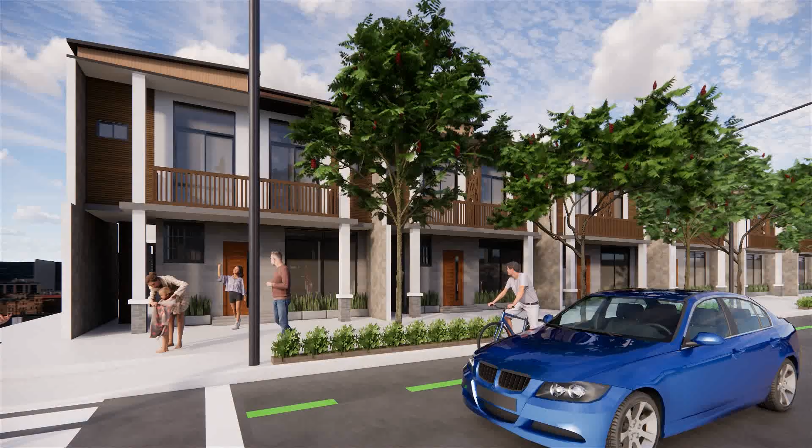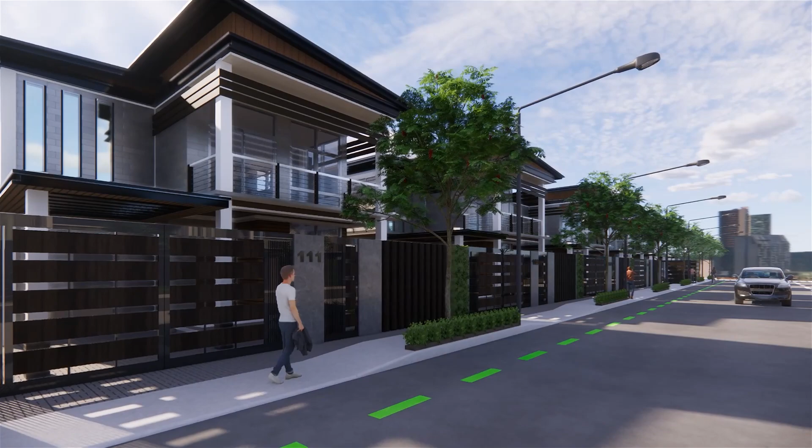Kahanggan, or kapitbahay, a common word known to all of us, is a direct derivative of kapit meaning to hold and bahay meaning home. We want to build a community that does not just provide shelter to individuals but also strengthen social bonds within each household, creating a socially just community where people of different classes can interact with each other. Thus, Alto Pueblo is born.

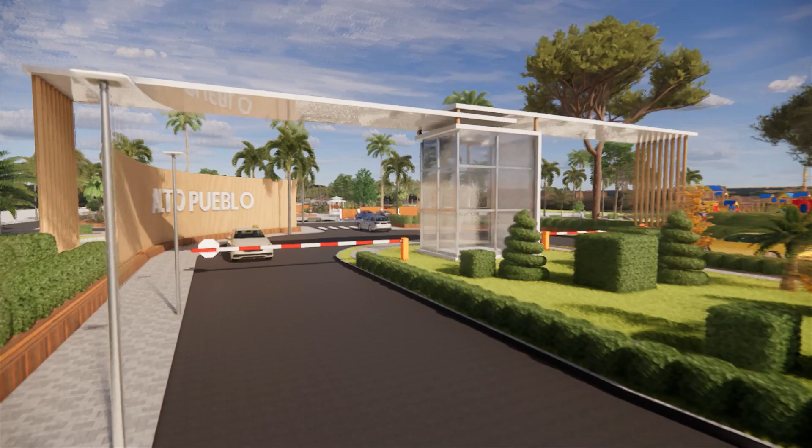Alto is a Spanish word meaning to rise, and Pueblo meaning a community. Together, this place brings an elevated living, literally and metaphorically, creating a community where each resident can rise to the standard of living with the aid of architecture.

Kahanggan: building human-centered comprehensive housing development through responsive neo-traditional urban community in Batangas City. The project Kahanggan aims to eradicate overpopulation by addressing inadequate housing in one of the most populated cities outside Metro Manila, Batangas City.

Barangay Wawa, directly adjacent to Barangay Libjo in Batangas, where the site is located, experiences problems in housing, such as rapid growing population, which in turn generates informal settlements. Such settlements can be seen and are observably evident along the shoreline of Barangay Wawa. Some of the locals are the Bajau community that lives off fishing, thus their strategic location on stilts above water.

The problem of overpopulation, which presents social and environmental problems, must be faced. The lack of job opportunities results in poverty, which in turn produces a higher crime rate. Furthermore, environmental impacts present as follows: pollution due to overpopulation results in lack of clean resources, which in turn destroys the mangrove ecosystem in Batangas. These problems all result in vulnerable living conditions.

The design concept of the housing development follows the practice of neo-traditional urban planning, or new urbanism. The concept of connected patterns of tiny, well-designed streets in neo-traditional neighborhood design is intended to increase community access despite modest design speeds. The multiple streets allow for more travel options to destinations while also dispersing traffic.

This concept will aid to give the local community an improved quality of life that abides with sustainability practices while boosting the economy and empowering the local culture.

For the form concept, we decided to go with the biophilic design concept, in which we will employ mangrove trees and stilt houses for the form of the building and as the unifying element for this project, which will be generated from a biophilic standpoint. The structures will mirror the shape and form of the tree in which it will be a suitable planting site.

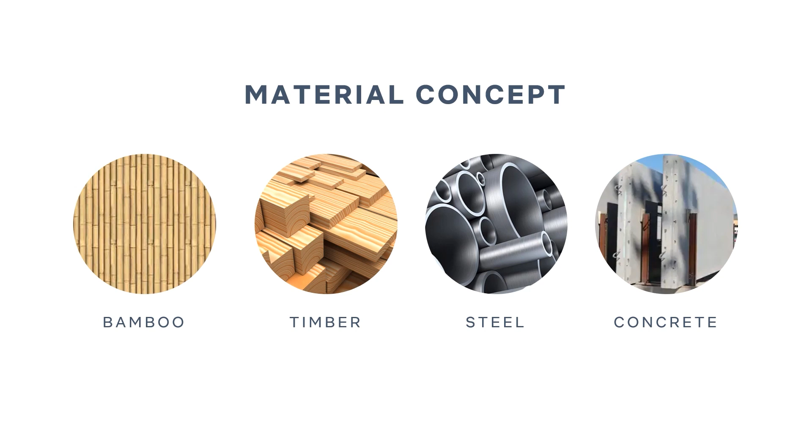Following that, our concept will consist of the traditional Bajau houses, characterized by traditional Filipino huts on stilts above bodies of water for the elevated form of the houses that is adopted in the design. In terms of materials, our proposed project will include bamboo and timber as well as steel and concrete.

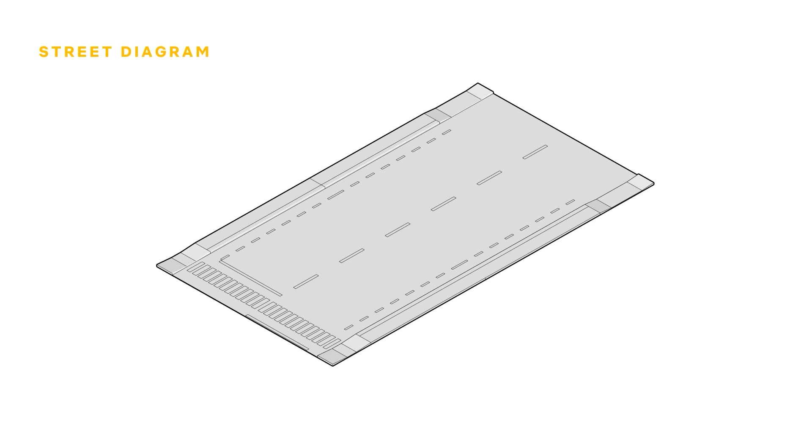Located in Libjo, Batangas City, the site covers an area of 215.13 hectares. Road networks follow the natural flow and contour of the land as well as follow a radial plan to ease and minimize traffic. The roads utilized in this subdivision are divided into the following: the road right-of-way, the bicycle lane, the pedestrian access, and the planting strip.

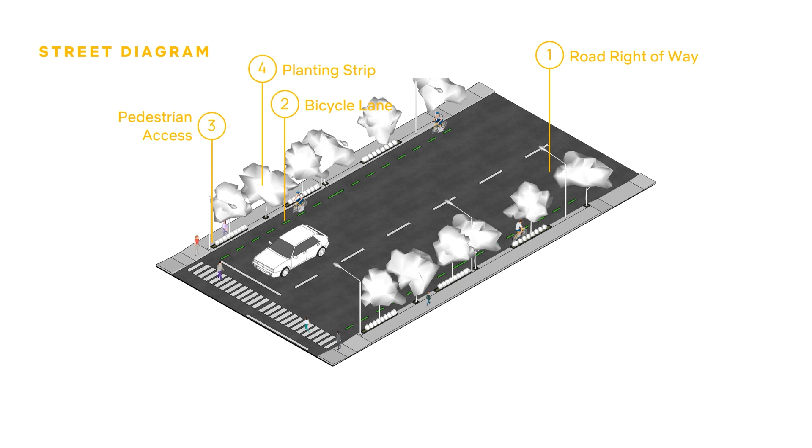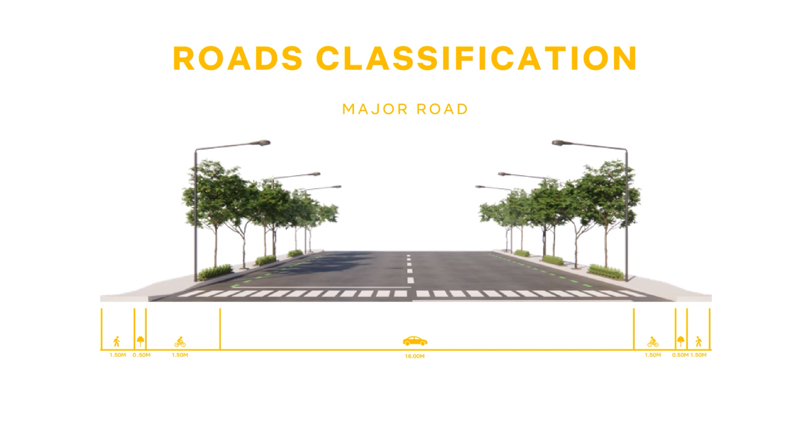The concept for these roads is to encourage walkability, for it to be more pedestrian-centric rather than being car-centric. These road divisions are applied in the three classifications of roads used in the subdivision, and they are the following: the major road, the collector's road, and the minor road.

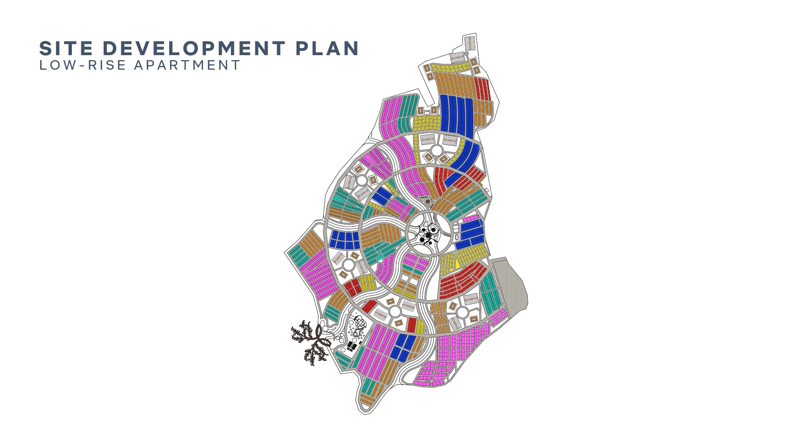Furthermore, housing types are integrated with each other, creating a mixed and diverse community to maximize social interaction. Housing types are as follows: socialized villas, economic villas, open market villas, socialized townhouses, economic townhouses, open market townhouses, mid-rise condominium, and low-rise apartment. Meanwhile, other facilities such as commercial spaces, daycare, and ecumenical chapel are also present on the site.

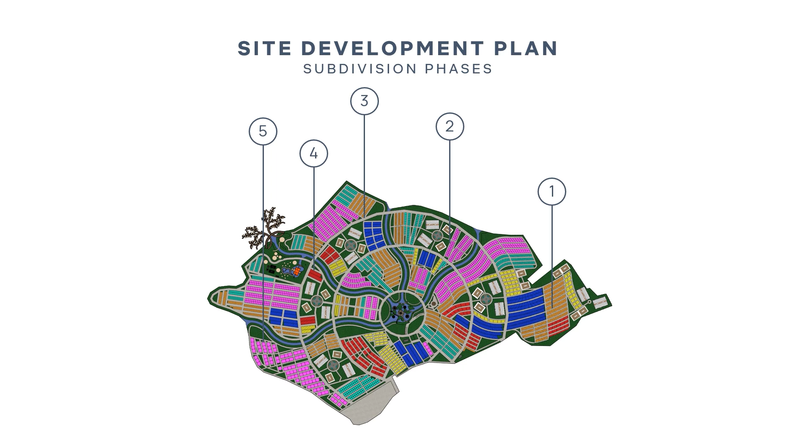Green spaces are scattered throughout the site to allow a breathable and communal space for each area of the site. Dividing the site are water channels that act as floodways to minimize flooding within the area. These divisions are phases 1, 2, 3, 4, and 5. Each phase has a mixed and diverse housing type as well as providing necessary services to each resident of each phase.

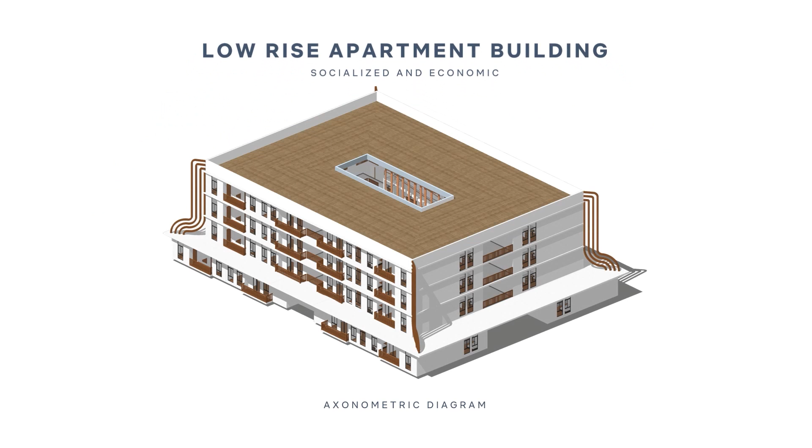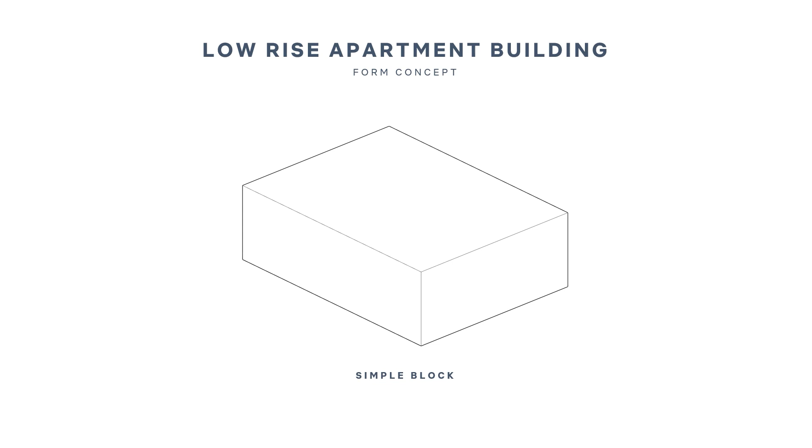Moving to the facilities and houses inside the Alto Pueblo, we'll start off with the low-rise apartment. The low-rise apartment is a 4-story building that is placed in the center of each phase. The building follows the form of a mangrove and is presented here in the form concept, starting off as a simple block. Next is the layering or division of floors. Next is conforming with the mangrove root shape.

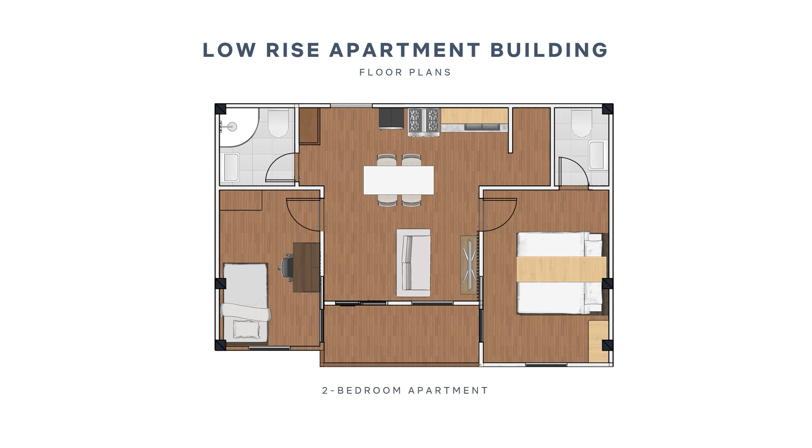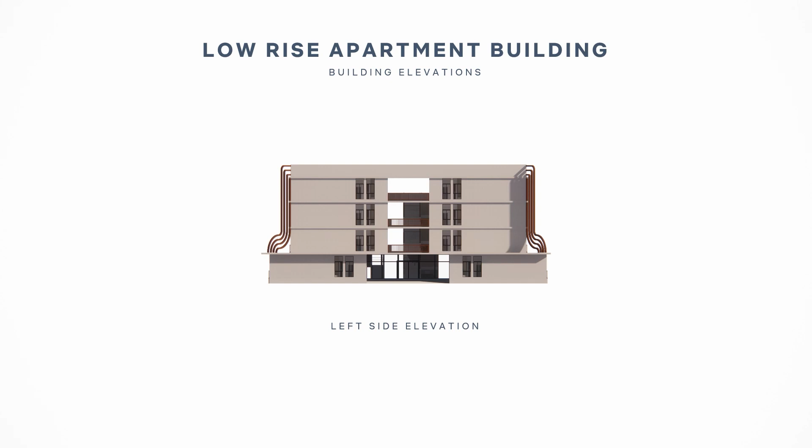The low-rise apartment provides a selection of low to middle-cost apartment units ranging from studios to one-bedroom to two bedrooms. The ground floor houses the main entrance and reception room, as well as the office and utilities, and 8 residential units. The second to upper floors have 16 apartments with 16 apartment layouts. Here's the elevation for the low-rise apartment. The materials used in this structure include prefabricated concrete, stucco finish, timber wood, steel, and bamboo materials.

The mid-rise condominium is an elevated, on-stilts, 9-floor, 2-floor unit building that sits on the center of each phase. The form follows the stilt concept as well as reflecting the image of a mangrove tree.

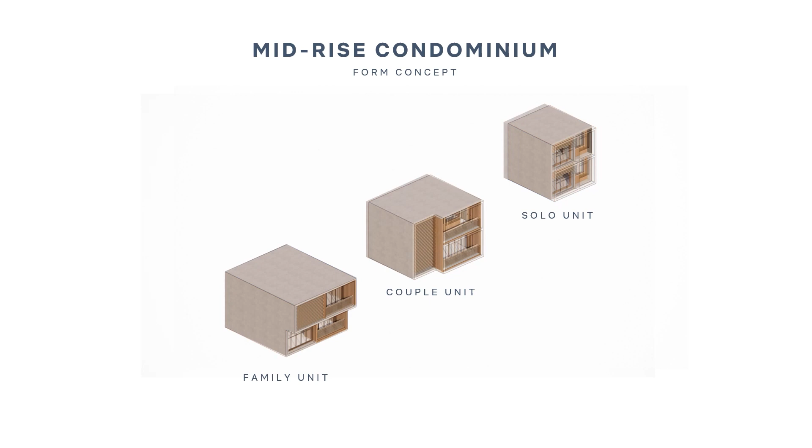The condo is a stack of units, namely solo unit, couple unit, and family unit. These units are supported by a 24 megacolumn that runs along the structure, holding each unit in place and carrying its load. Overall, the condo consists of 4 stacks of units.

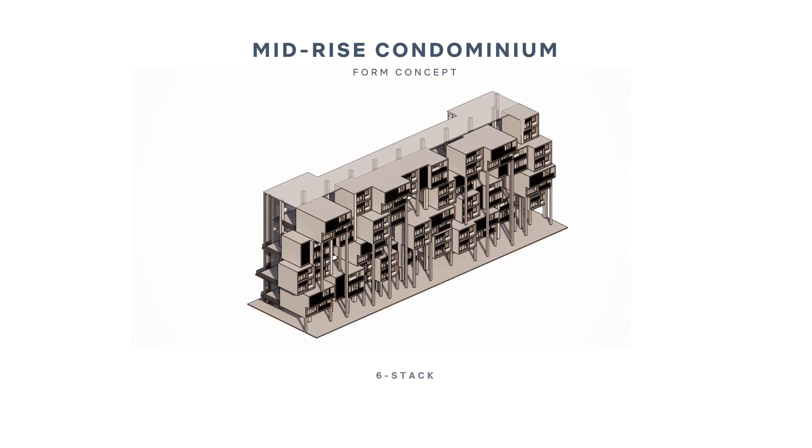The final designs mimic the mangrove with irregular and undulating lines of columns and stilts reflecting its roots.

Moving on to the interior, each space caters to different users. The solo unit, catering to one user, has a living space, kitchen and dining, toilet and bath, and a master's bedroom with a master's toilet and bath.

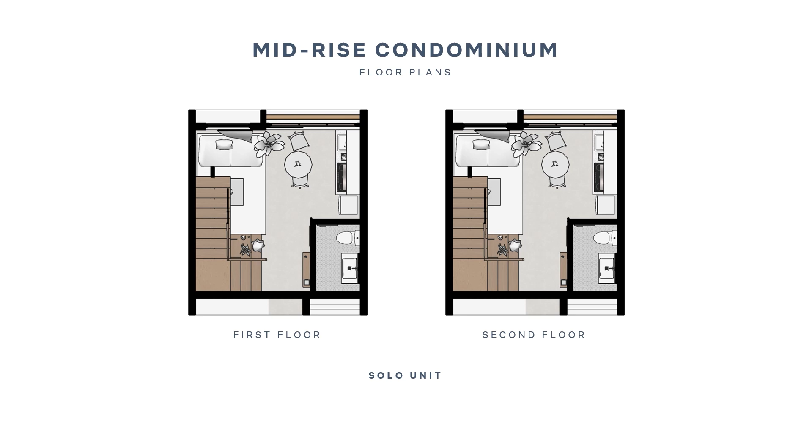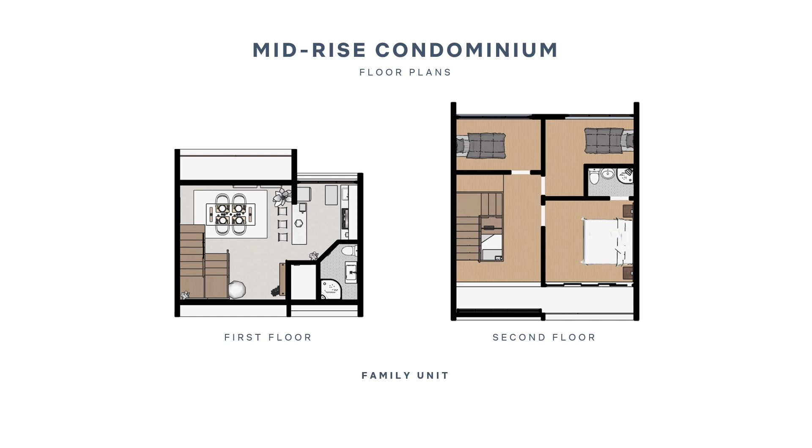Lastly, the family unit is offered to residents with bigger families. The spaces are also similar, with a living space, kitchen and dining, toilet and bath, a master's bedroom with toilet and bath, with an additional 2 single bedrooms.

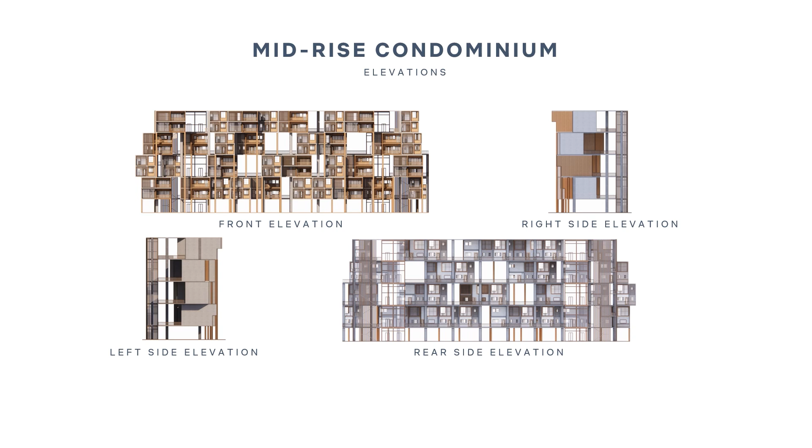Materials used throughout the buildings are dominantly concrete with accents of wood. The structure's aesthetics is emphasized by the presence and abundance of vegetation covering each level.

The first type of row house is the socialized house. It has a lot size of 48 square meters based on the standard lot area for single attached houses in BP 220. In addition, the economic house of the row house has a lot area of 54 square meters based on the standard dimension also given in BP 220.

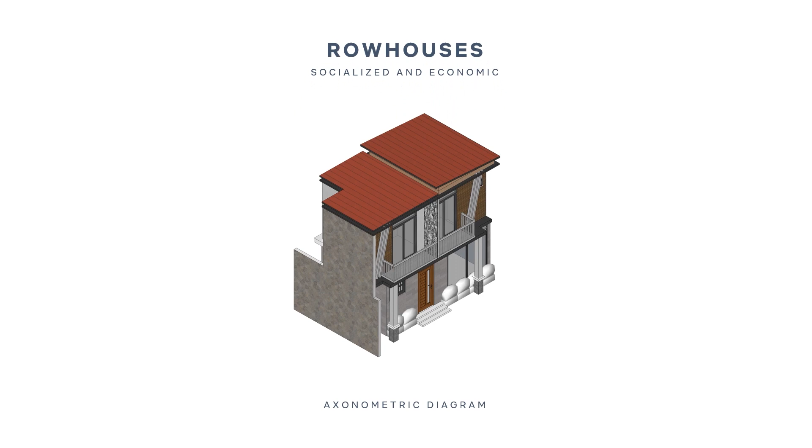Now we'll move on to the form concept of the row houses. The form of the socialized and economic row houses employs our secondary form concept of stilts, wherein the columns exhibited at the front of the house are connected from the finished floor up to the roof, that also act as a support for the front of the houses, which demonstrates the stilts concept.

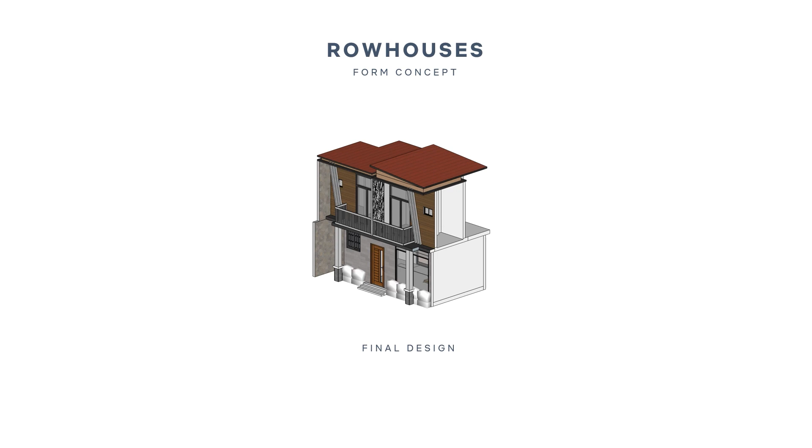Now the floor plans. The socialized house has 2 stories and includes a living area, kitchen and dining area, a powder room, service and laundry area, and 2 bedrooms with separate bathrooms on the second floor.

The economic home row house also includes a living area, kitchen and dining area, a powder room, a service and laundry area, and 2 bedrooms with separate bathrooms on the second level.

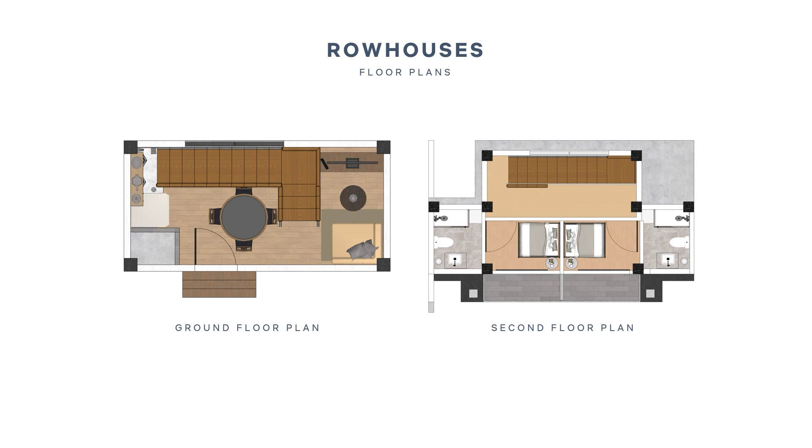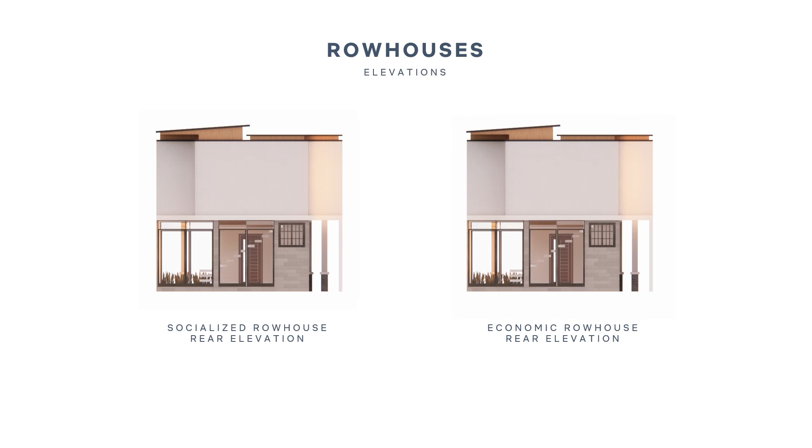We have also decided to use concrete and wood as the main materials for both row houses since, as previously stated, our concept includes neo-traditional urban planning or new urbanism on what we wish to use.

Another option of townhouse that we offer is the 3-story open market townhouse. It has a lot area of 105 square meters and has all the features that a family needs. It is perfect for a medium-sized family with enough space and a refreshing look.

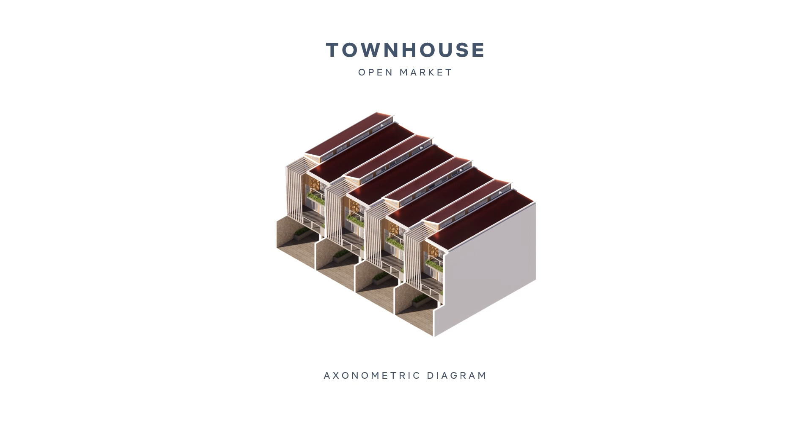Shown on the screen is the form concept of the 3-story townhouse, which comes from a simple block, which then turned into the layers of floors, the detailing, the application of architectural details, and the final design.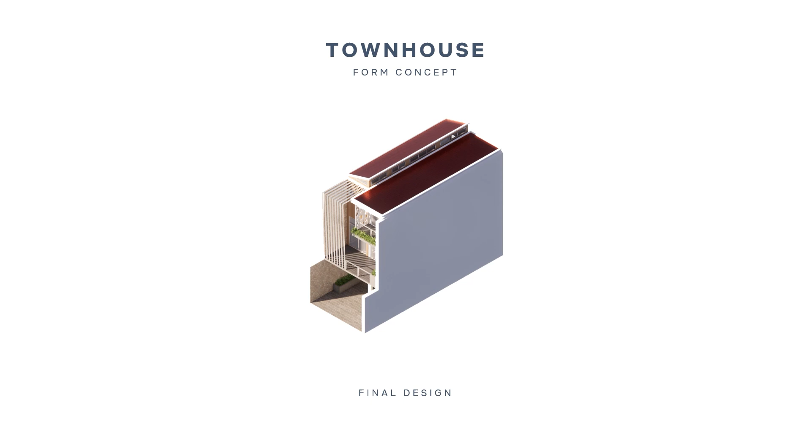The open market townhouse is incorporated with an exposed column in order to include the stilt architectural style, in addition to the mangrove-inspired perforated walls that also regulate light penetration in consideration of the climate of the area.

The open market townhouse is composed of 3 floors. The ground floor holds the parking space, which is spacious enough to fit an SUV, in addition to motorcycles and such. Once you enter the patio, you will be welcomed with 2 doors leading to a powder room and the laundry area.

The idea with the inclusion of a large area outside is in consideration of the Filipinos' love for gathering. The powder room is placed there for use of visitors and owners without needing to go inside.

The main door is found on the right side of the patio, leading to the foyer and staircase to the second floor. The second floor is where you'll find the living area, kitchen with bar, the dining area, a common toilet and bath, and a balcony.

Going back to the staircase and up to the 3rd floor are the bedrooms. First is the master bedroom, which includes its own balcony, a walk-in closet, and a large toilet and bath. There are also two other bedrooms on the floor level, as well as a common toilet and bath.

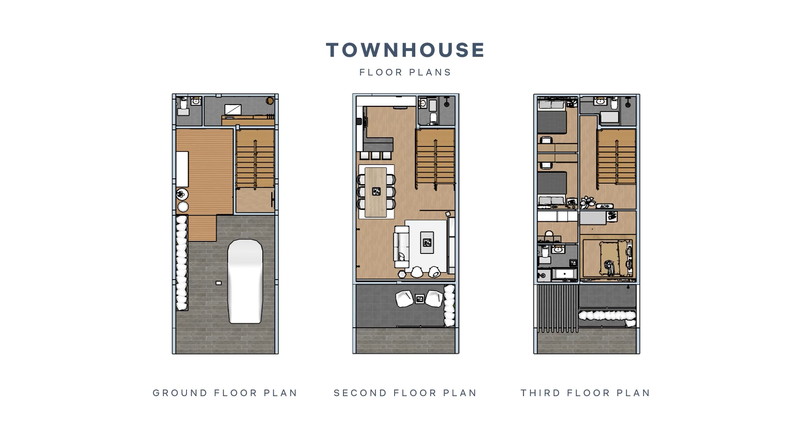The materials used in this townhouse are mainly concrete and wood, similar to the others. You'll be able to see the perforated walls and the vertical elements that act as louvers.

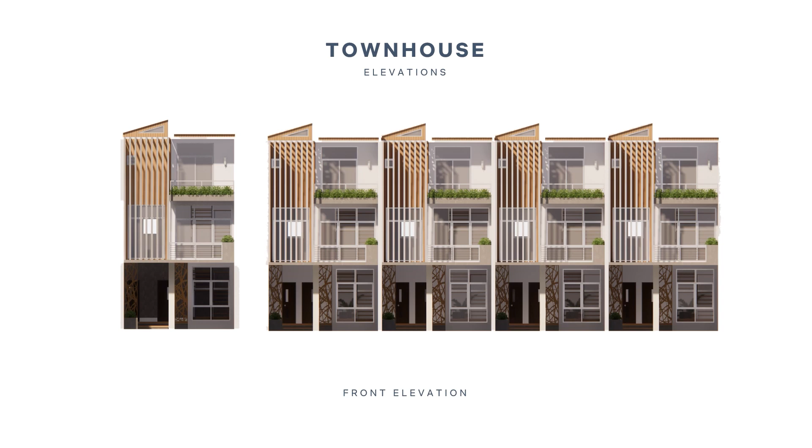This townhouse presents a refreshing look with vegetation included on the ground floor and the two balconies, aligning its design to the other housing units offered.

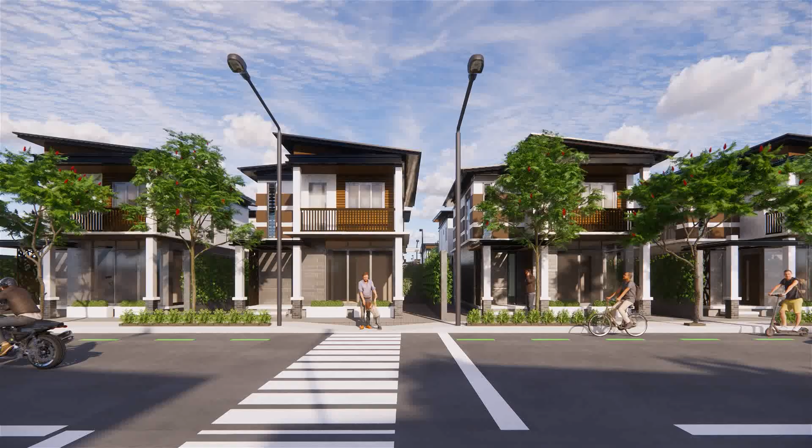Land villas range from socialized to open market for local land residents. These single detached units cater to three market segments: socialized, economic, and open market housing. Each dwelling offers a diverse living experience, ideal for startup family homes or anyone seeking a vacation rest house.

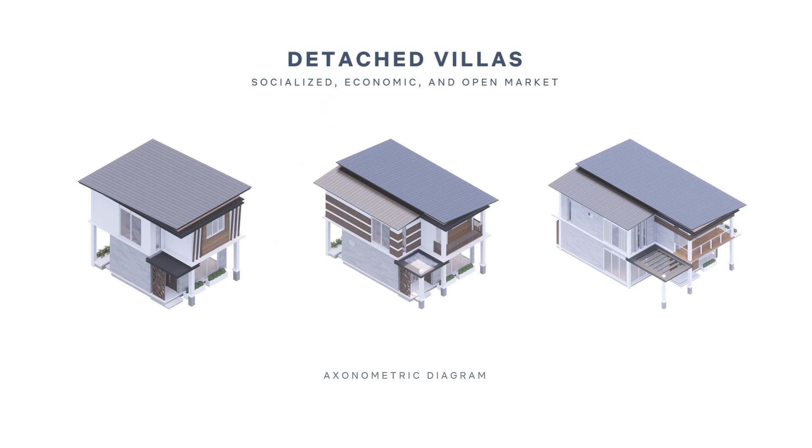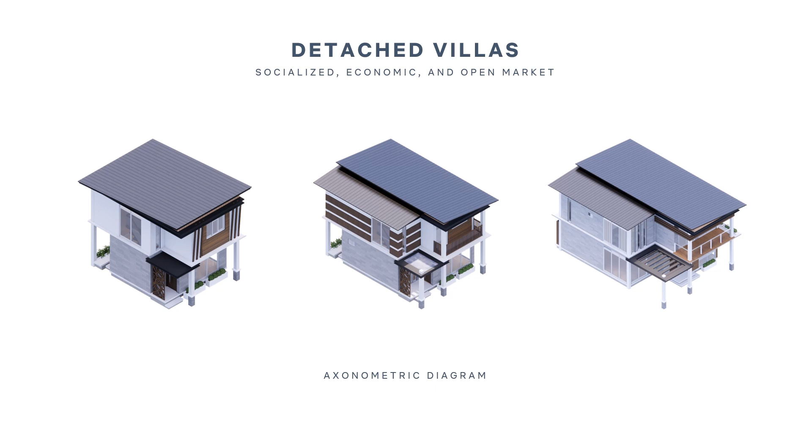The axonometric diagram of the socialized, economic, and open market land villas shows how the design was developed from a simple block to the layering of floors, detailing of each story, finishing of the facade and main entry, application of architectural detailing, and the final design.

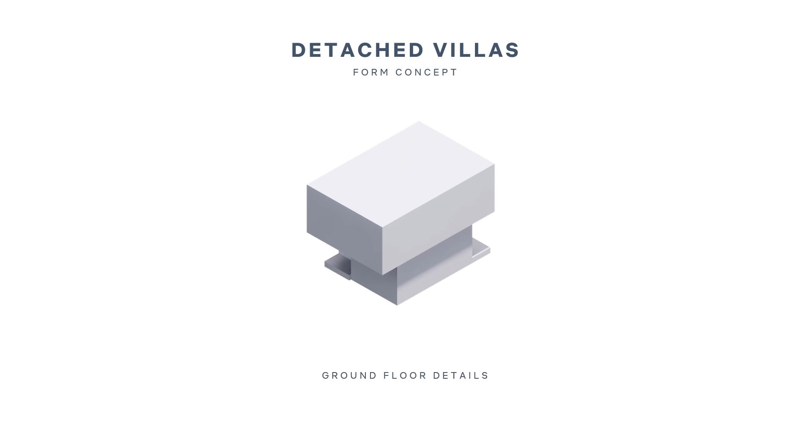The building forms of these land villas mimic the stilt architectural style through its extruded second floor, supported with exposed columns to utilize much bigger spaces, and the incorporation of unifying design elements, the use of vertical and horizontal elements, and a mangrove-inspired perforated wall for daylight penetration and controlled indoor air quality.

Next are the floor plans of each villa. The socialized villas consist of the basic spaces: the kitchen, dining, living area, service area for laundry, and a master's bedroom, and a toilet and bath on the second floor.

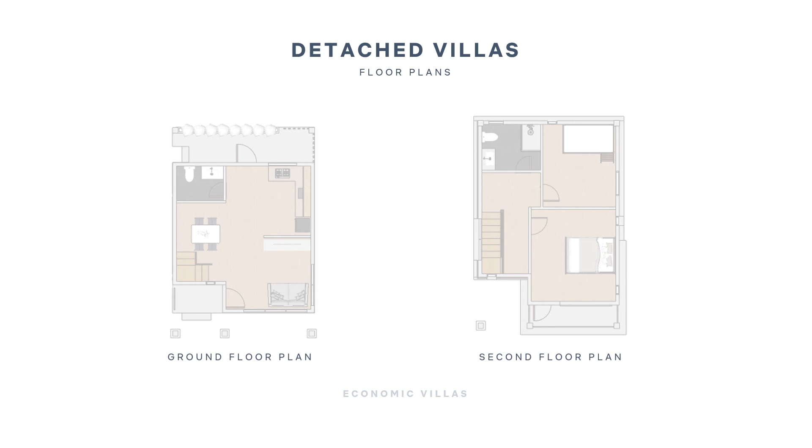Followed by the economic villas that provide bigger spaces and better layout, featuring the kitchen, dining, living area, service area for laundry, and a powder room on the ground floor, and a master's bedroom with balcony, bedroom for other family members, and a common toilet and bath on the second floor. Lastly, the most elegant type of villa, offering all the amenities perfect for quality and secured building homes.

The open market or medium-cost villas consist of a kitchen, dining, and living area, toilet and bath, a service area, and an outdoor patio on the first floor that can hold several guests. The second floor features 3 bedrooms, a master bedroom with its own toilet and bath, 2 bedrooms with a common toilet and bathroom, and towards the hallways a vestibule leading to the large balcony where people can relax and spend time together.

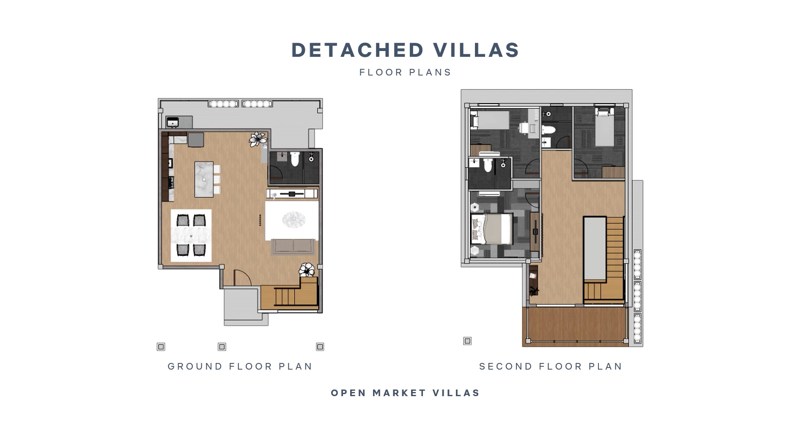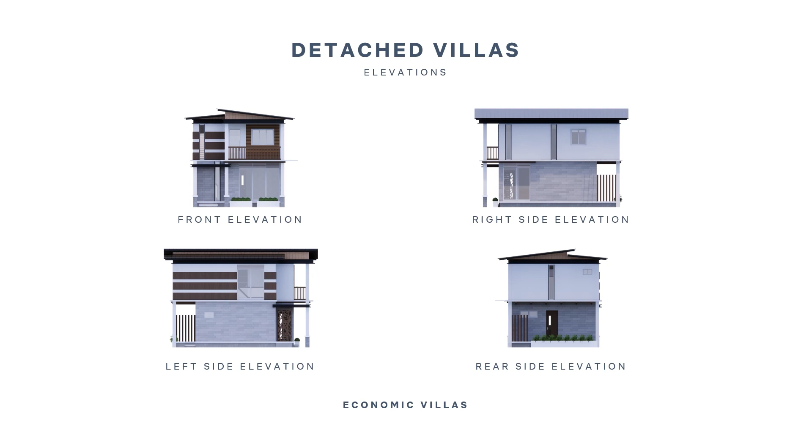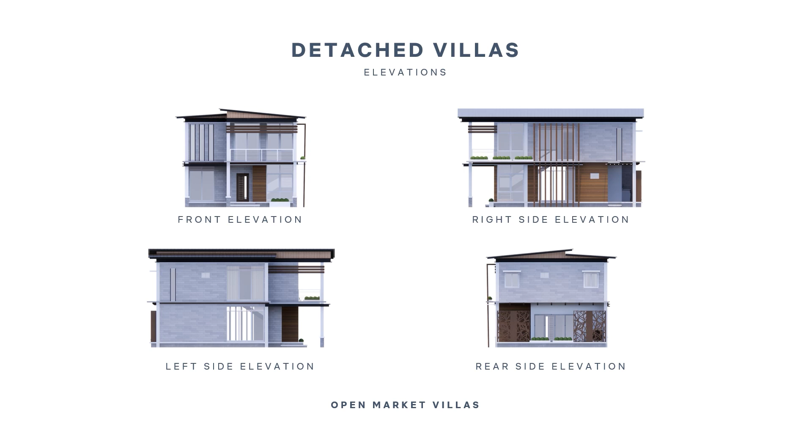The elevations of each villa feature unifying materials but in a distinctive approach depending on its market value. These land villas can be recognized from the form and design, where the socialized villas have limited open spaces for a reasonably priced design, economic villas feature a quality of design and experience, and the open market villas have considerable design, featuring exquisitely detailed architecture.

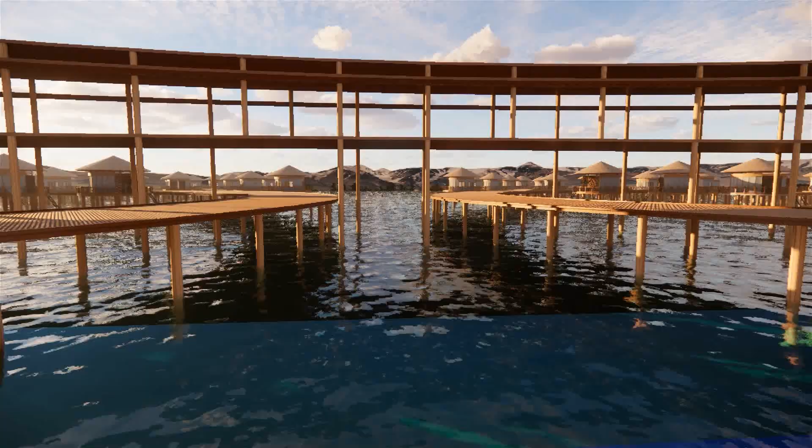Lastly, stilt villas are prefabricated bamboo homes placed on top of the seawaters of Batangas Bay. These villas are offered to the working class of the nearby residents of Barangay Libjo who practice fishing for a livelihood, specifically to the Badjaus who are known seafarers.

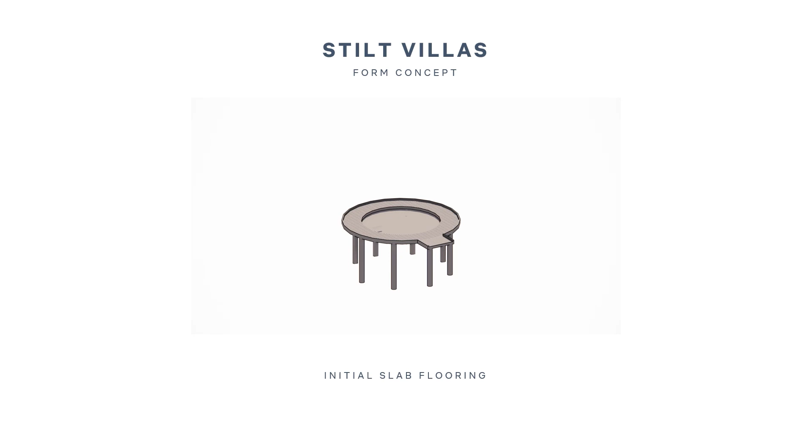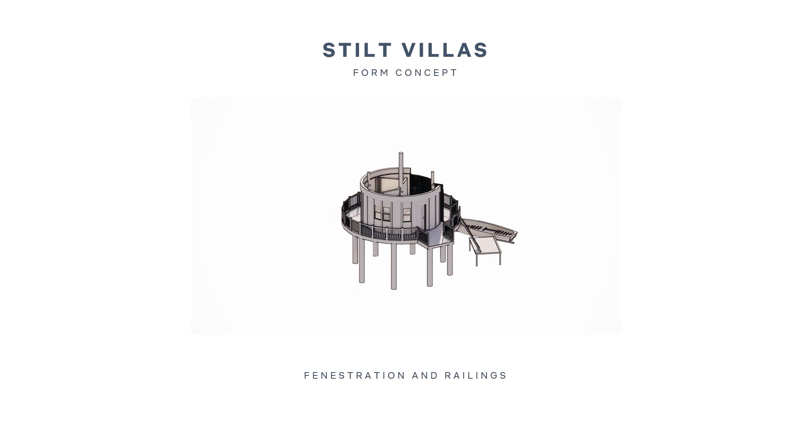Stilts are made out of pressure-treated lumber, wood flooring and slab are then laid out, and wood columns are added into the home itself to provide additional support to the structure. Prefabricated walls are then placed as well as windows and doors, and lastly, a bamboo roof framing is added.

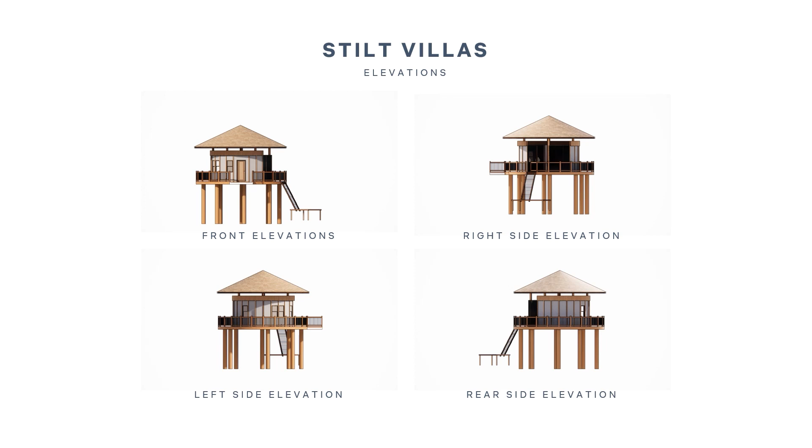The home features a living space, a kitchen, dining, toilet and bath, one master's bedroom, and an optional loft where it can serve as sleeping quarters for residents with bigger families. Purely made out of bamboo and timber, a sustainable yet resilient home is created.

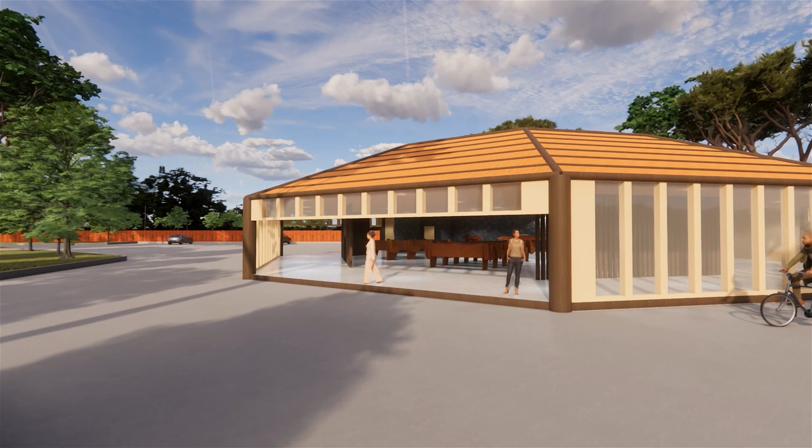The Alto Pueblo Ecumenical Chapel is a private, non-denominational chapel used for meditation wherein everybody may be able to use the structure how they want to. The chapel in our development can be utilized by anyone who wants to spend time alone with God and pray in peace and quiet. The form that was designed is derived from mangrove stilt houses.

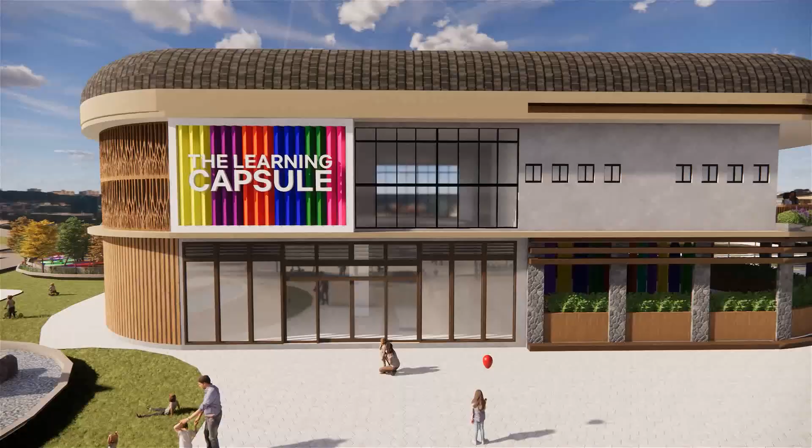As for the daycare, in addition to the rooms specifically designated for children in the development, our amenities include a daycare center, the so-called Learning Capsule, where residents' children may enroll and parents will be able to drop off and pick up their kids for a while so they can experience socializing with other kids. Outside the building, there is also a children's playground for the kids to enjoy.

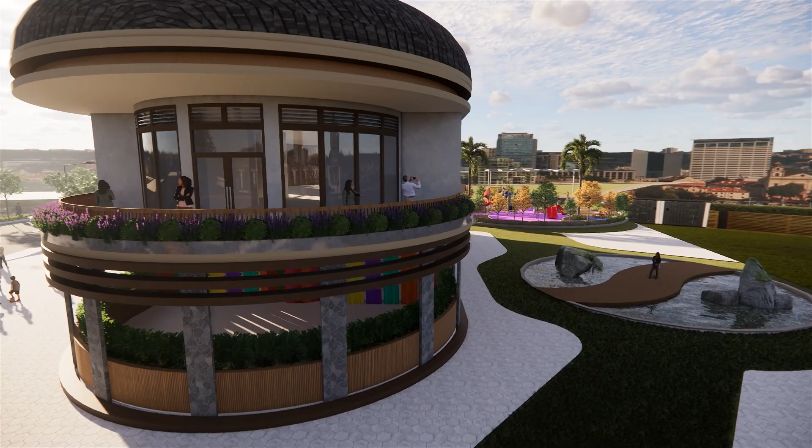For the form, the building's shape was inspired by the idea of a capsule, which is why it is called the Learning Capsule. One of the special features of the central amenity is the mangrove forest park, which acts as a water basin and reservoir.

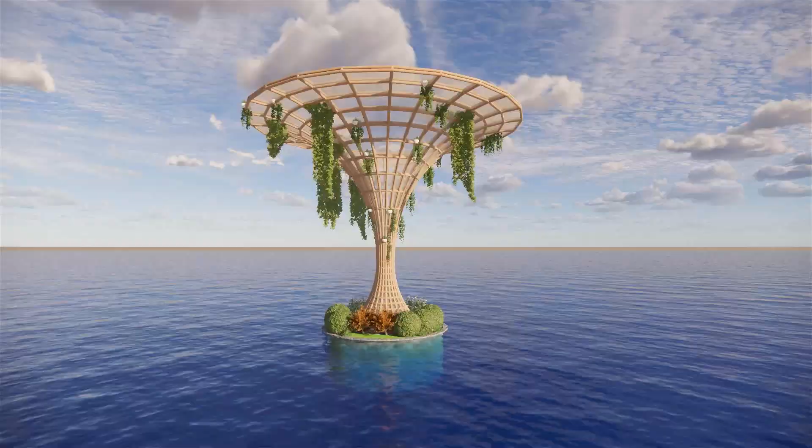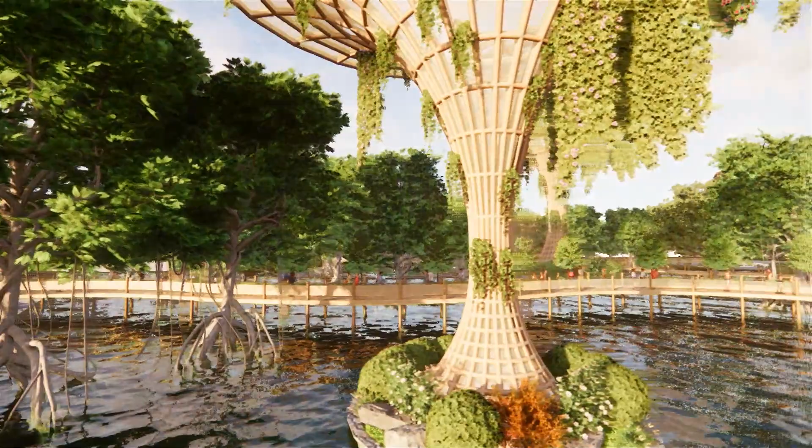It features super trees inspired by the Gardens by the Bay in Singapore, acting as a water catchment, allowing a more sustainable approach and practice to generate energy within the site. The park is a massive water reservoir with waterways connecting it to the Batangas Bay. This allows drainage of water within the site while also creating a sustainable practice to generate energy within the site.

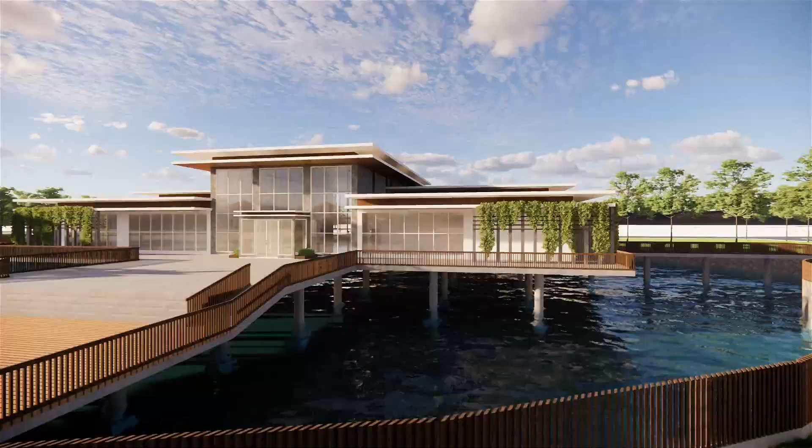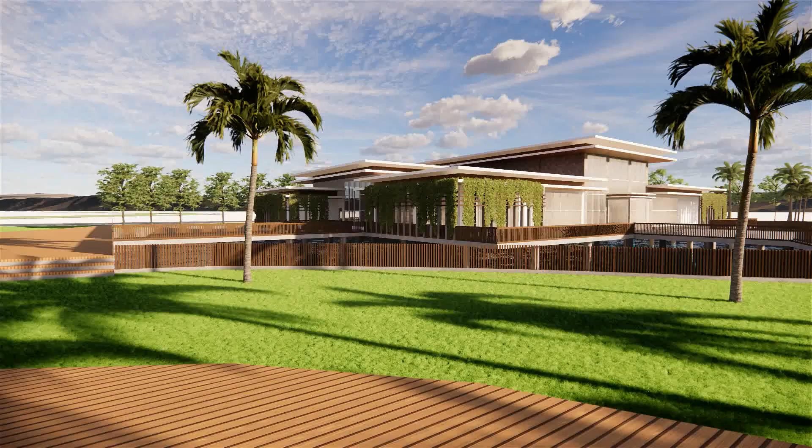A community center is also present, providing a sheltered space for functions and events among residents of the Alto Pueblo. The clubhouse is a space dedicated to future homeowners where people of all age groups can socialize and enjoy its amenities. The clubhouse stands on top of a lake connected to the water channels around the site. Stilt architecture is evident in this structure, with the clubhouse supported by numerous pier foundations.

The structure is accessible by two main entrances, one facing the road and another facing the pool, and two others on the left and right sides as emergency exits. The clubhouse is composed of a high-ceiling lobby, two function rooms, two conference rooms, management offices, and the utilities.

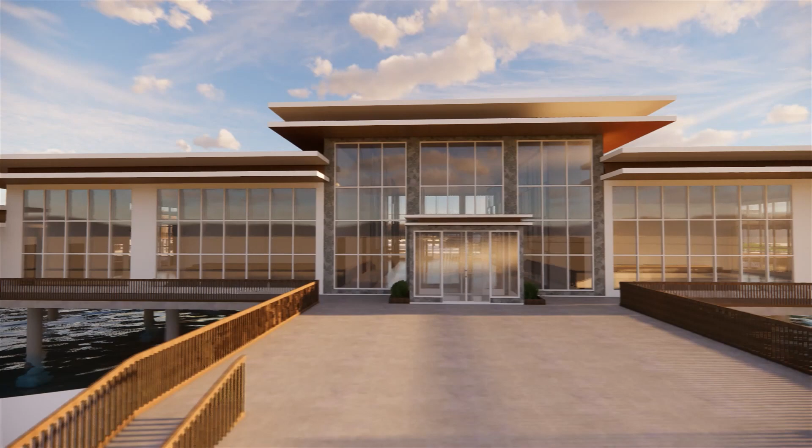Hanging vines are placed along the walls to provide shade, as well as incorporating the unifying style of having vegetation around the structure. The clubhouse is an area dedicated for the homeowners as a place of socialization and entertainment.

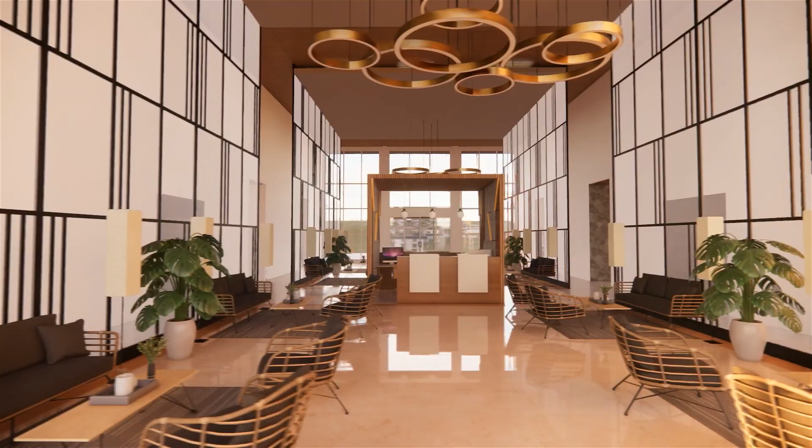The pool is directly adjacent to the clubhouse, with gazebos similar to the stilt villas scattered around the area. The facility is open to the homeowners as a place of entertainment and relaxation.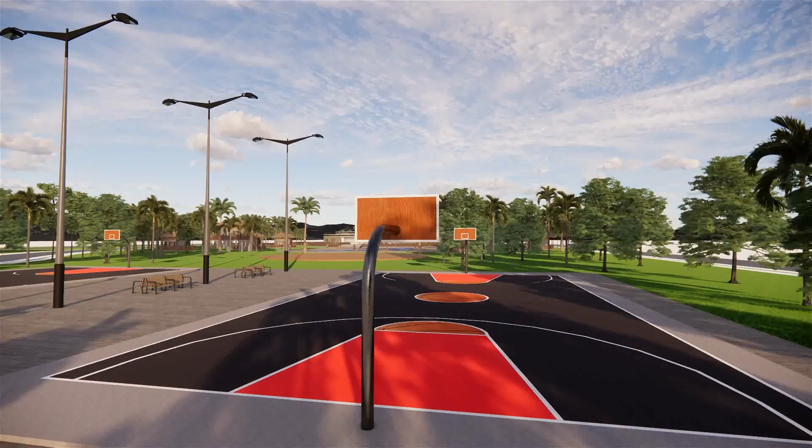The sports complex, also in the zone along the clubhouse and pools, centralizes the entertainment facilities in one area, containing two full basketball courts that also double as volleyball courts, as well as a tennis court.